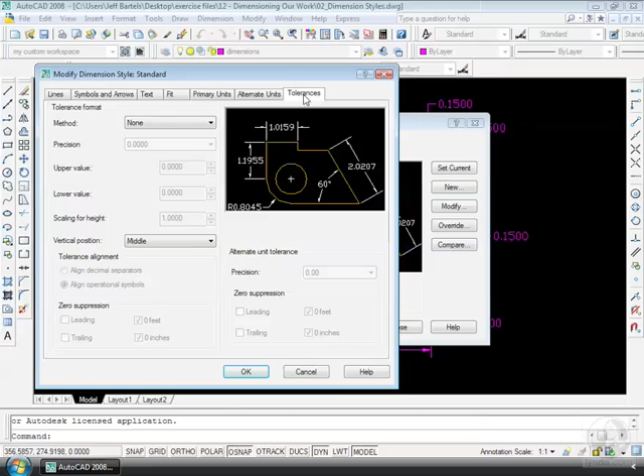This brings up my Modify Dimension Style dialog. From here, I have 7 tabs of settings that control how my dimensions look. Now, we're certainly not going to go through all of these settings—we're going to go through a few of them to give you an idea of how they work, but I am going to show you how you can find out what each setting does on your own.

The first way is to come up to your little question mark button and click. Remember, this is your help feature. If I click this, AutoCAD puts the question mark on my cursor, and I can take it to whatever setting I wish and click, and AutoCAD will tell me everything I need to know about that setting. That's one way to learn what the settings do. Let me hit Escape to clear the help text.

I'm going to jump to my Lines tab for a second. Another way we can learn what the settings do is to keep an eye on the preview window. More often than not, when we change a setting, we'll see the change reflected in the preview window.

For instance, I'm going to check the box to suppress dimension line 1. And when I do, watch the preview—notice the dimension line's gone. Now we know what that button does. Let me click again to bring the dimension line back.

I'm going to come down and let's suppress an extension line. Let me put a check in this box to suppress extension line 1. All right, now we know what that setting does. Let me click again to turn that back on.

Notice the settings on the tabs are grouped under major headings. That can be very helpful—at least it makes it appear a little less overwhelming when we look at the number of settings.

Let's make a change. The first change I'd like to make is the number of spaces to the right of the decimal.

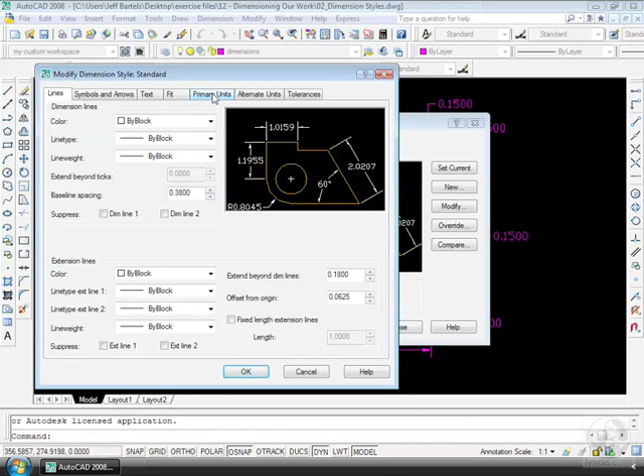If we look at what we can see in model space, I can see that all of my dimensions are to 4 decimal places. I'd like to change this. So I'm going to go to my Primary Units tab and click. These are the settings that control my units. Right now I can see in the precision area that it is set to 4 decimal places. Let me click the drop down and I'm going to set this to 2.

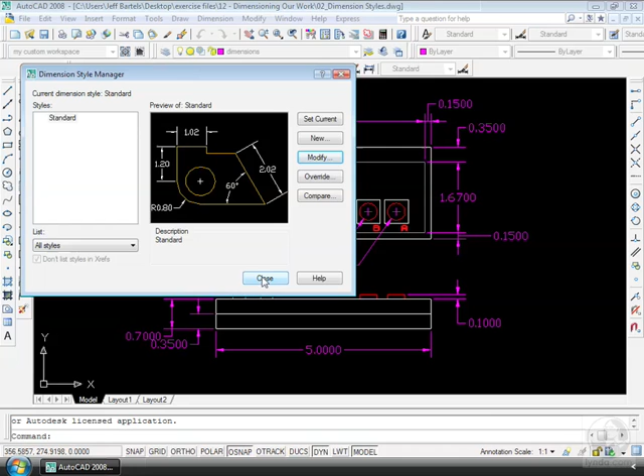Now that I've made a change, let's return to the drawing. I'm going to click OK to dismiss the dialog box. Now I'm going to slide my Dimension Style Manager to the side, and when I click Close, watch my dimensions. Since all of the dimensions are entered via a style, a change in the style updates all my dimensions, so now they're all 2 decimal places.

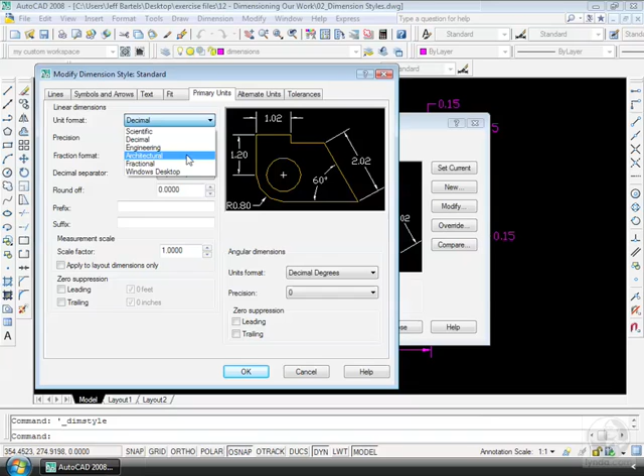Let's make another change. I'm going to go back up and click the Dimension Style icon again. Once again, my current dimension style is highlighted, so I'm going to click Modify. Since we're on the Primary Units tab, let's take a look at Unit Format. Currently, everything is dimensioned using decimal units. If you're an architect, you'll want to click the drop-down and set this to Architectural. If it's set to Architectural, your dimensions will be in fractional units. Now I'm going to put it back to decimal.

Let's jump to the Text tab. The Text tab has settings that allow me to control the way my text looks. The very first setting that I have is Text Style. Notice that I can select a text style for my dimensions if I wish. I could click the drop down here and I could select from a different style if I had one. Or if I click the ellipsis button, I can create a new style or modify this existing one.

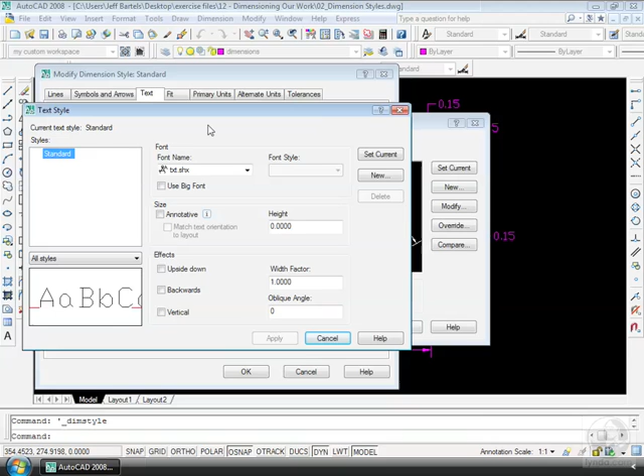Let's make a change to the standard text style. I'm going to change the font to Arial. So let me click the drop down. We'll move up and I will set this to Arial. Let me click to make the change. We'll click Apply, and we'll click Close. Notice the preview window changes.

I want to make one more change on this tab, and that's the text height. Now the value that I have here should represent the height that I want my text to appear when printed on paper. That's very important. Any size dimension that we make in our dimension style dialog should represent the size that we would like our dimension to appear when printed on paper. So 0.18 is pretty tall. I'm going to change this to 0.125.

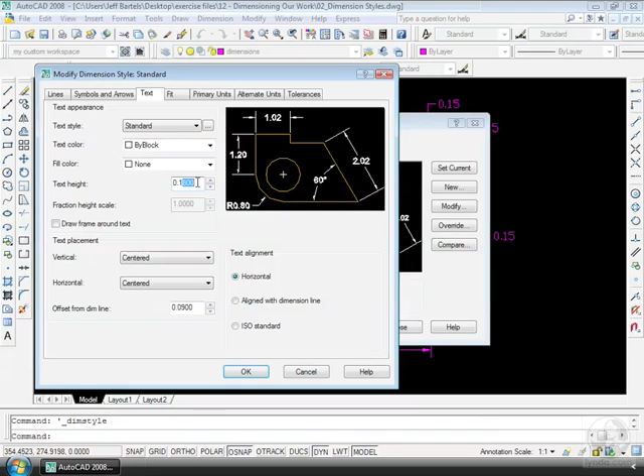Let me click OK. Let's move the Dimension Style Manager over so we can watch the magic happen. Let me click Close. Notice my dimensions have changed. I want to make one last change because these arrowheads are quite large. Let's fix them. I'm going to come up to my Dimension Style button and click.

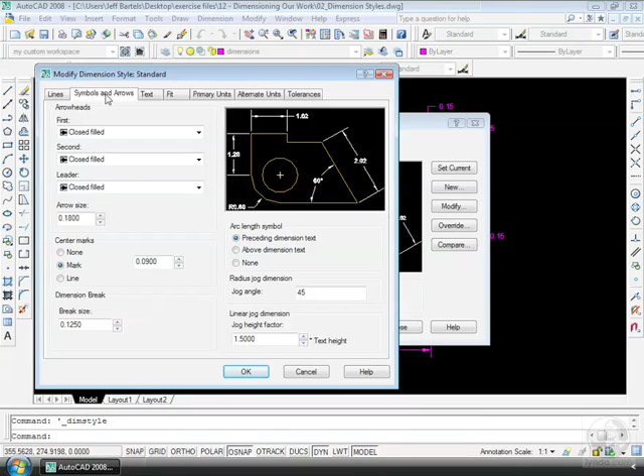We'll select Modify. And I'm going to go to my Symbols and Arrows tab. Let me click this tab. And if I come right down here under my Arrowheads group, I have a setting for arrow size. Now remember, this is a size setting, so I want to set this to the size I want my arrows to be when they're plotted. I'm going to set this to 0.12.

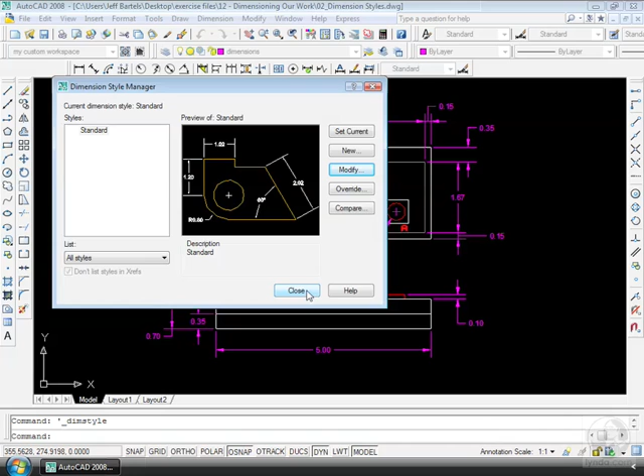Once again, we'll click OK. We'll move the dialog so we can see the change happen, and we'll click Close. Dimension styles give us the same flexibility as a text style. If we need to make global changes to the appearance of our dimensions, we can simply modify our dimension style and all of our dimensions will update automatically.